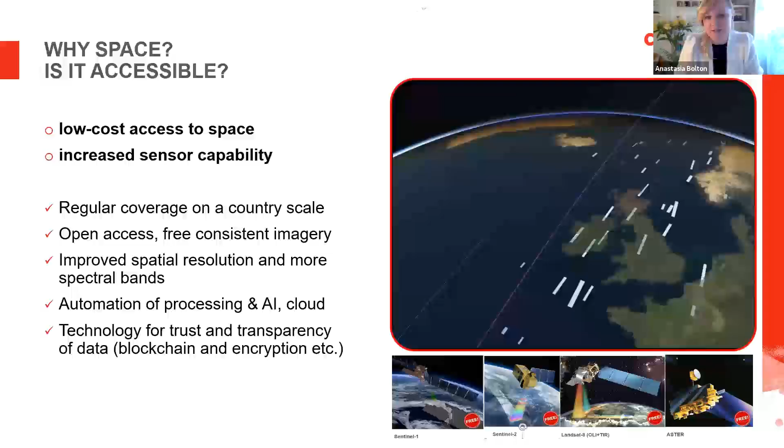Next slide please. In terms of impact, safety is of course vitally important, especially with those dams located upstream near heavily populated areas, where the consequences of failure could be really great. So the proposed remote management and monitoring system could really help with early warnings, which could help save lives and prevent environmental damage. It would be a tool to help make fast and informed decisions, reduce failure risk and associated costs, and improve asset management and monitoring. We can also look into the past, because satellite data goes years back, and we could analyze historical data. And satellite technology is open to work in combination and collaboration with already existing methods.

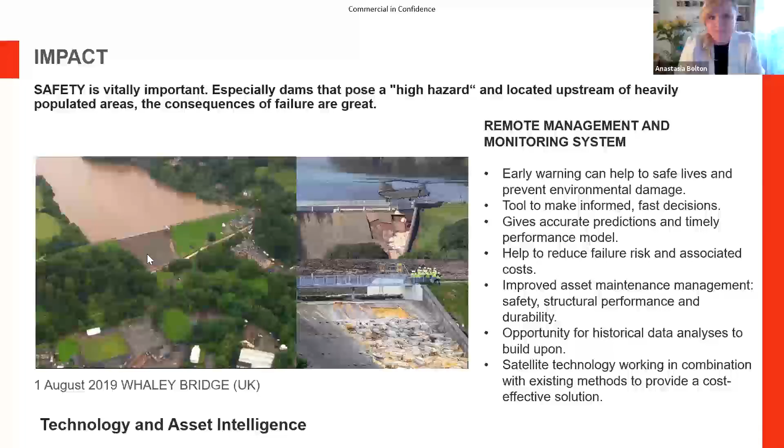Next slide please. You would ask how the technology works. It's very simple, I put several slides to explain, I hope you'll have more time to look later. But basically, we're analyzing images from space, and we could understand the movement of the ground in millimetric accuracy from space. We could understand how points on the ground are moving, and when we have lots of points on the ground, we can have a more full picture. Next slide please.

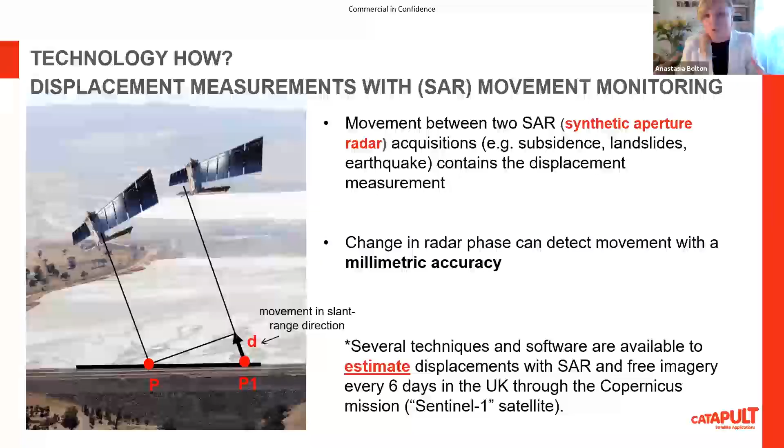Here's an example of how the technology is already used in mining. This is an example of how we're analyzing tailing storage facilities, or tailing dams, with the same technology.

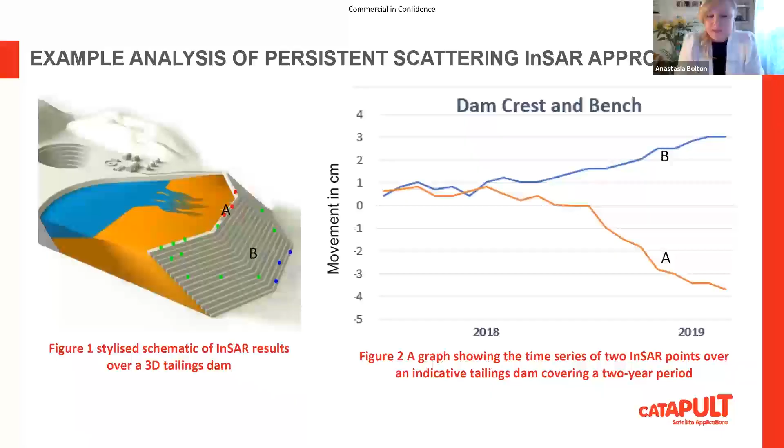Here I've put some of the existing platforms and visualization tools, some of which are already in place. The one at the top is for tailing monitoring, and at the bottom is the one which looks over floods and predicts them, and the one on the right hand side looks over large infrastructure such as bridges.

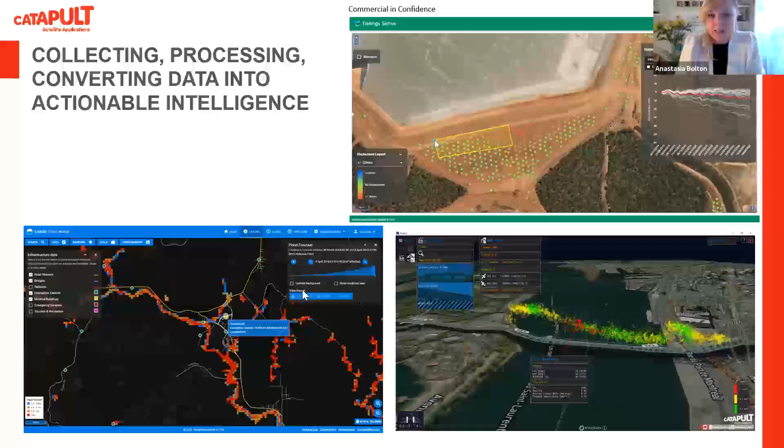I also wanted to mention that Catapult's human-centered design and collaborative approach is really important, because we're really trying to ensure that the solution which we design is based on a deep understanding of the needs and requirements.

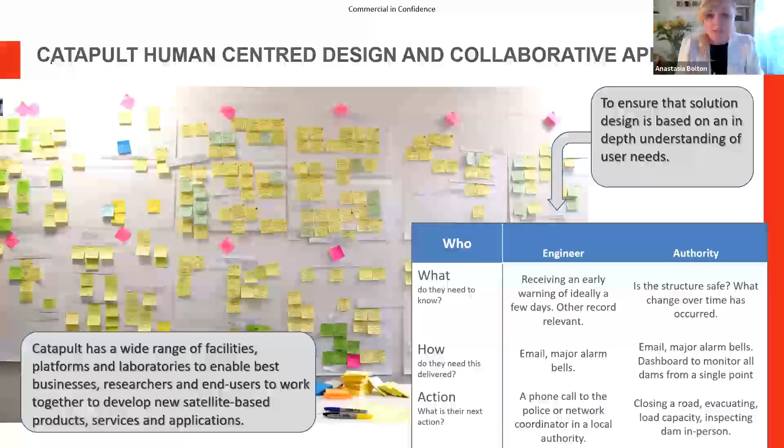Here's what we are looking forward to. I hope to build relationships today with one or several water companies, and I hope to develop this solution into an initial pilot which we can take further.

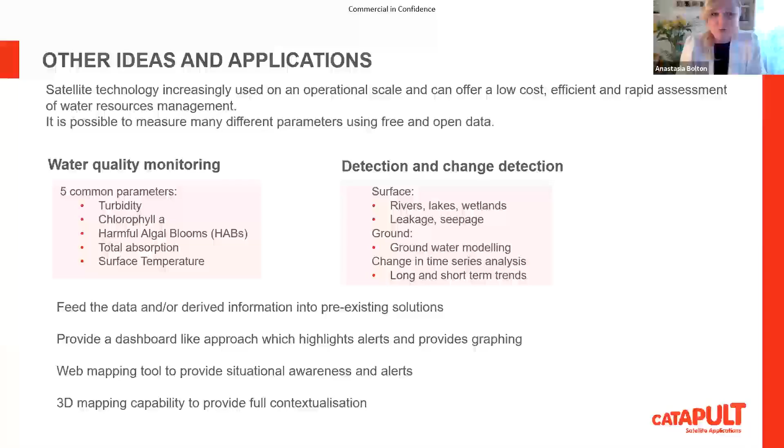I know there is another space company talking after me with other solutions from space, so I put this slide together for you to read later.

I think I'm done, I tried. Thank you, Anastasia, that was really difficult - you covered a huge amount there, so I appreciate that. I could see that you had a large number of slides.

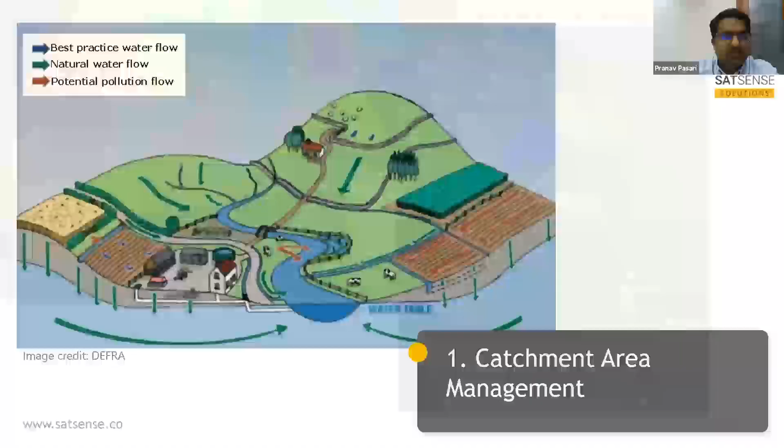As many of the water companies here have extensive catchment management practices, the importance of having healthy catchments is well understood. I'll be showcasing how satellite data can be used to facilitate and enhance catchment management practices.

In this example of a catchment management case study, satellite-derived topography data is used to demarcate catchment boundaries and determine flow directions. Land use and land cover is assessed within the catchment. Hazards and risks specific to the water resources are then identified. In this case, a salvage yard very close to the reservoir with a drainage direction towards it is identified.

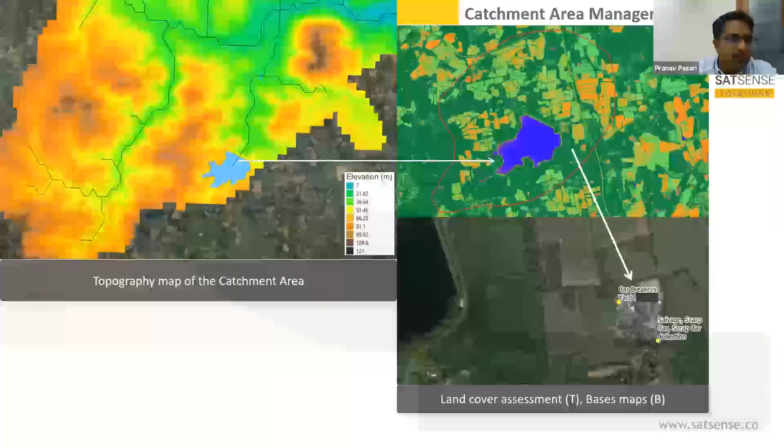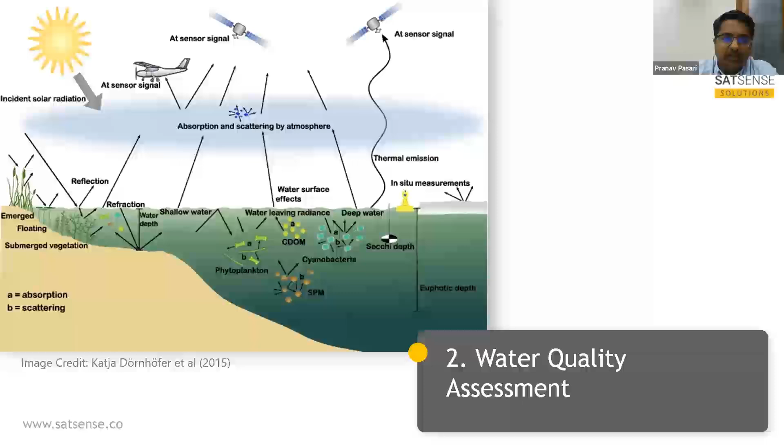The second solution we would like to share with you is water quality assessments using satellite remote sensing. The working principles of this process are indicated here. The inherent optical properties of surface waters are evaluated, and parameters such as total suspended solids, chlorophyll A concentration, color dissolved organic matter, and transparency can then be assessed.

In the images here, we see TSS assessed in a reservoir and a river. As you can see, water quality parameters assessed are spatially represented for the entire water body, unlike point data collected by conventional methods. This solution can be used for the early detection of harmful algal blooms, managing sedimentation of reservoirs, and bath water quality assessments, amongst other applications.

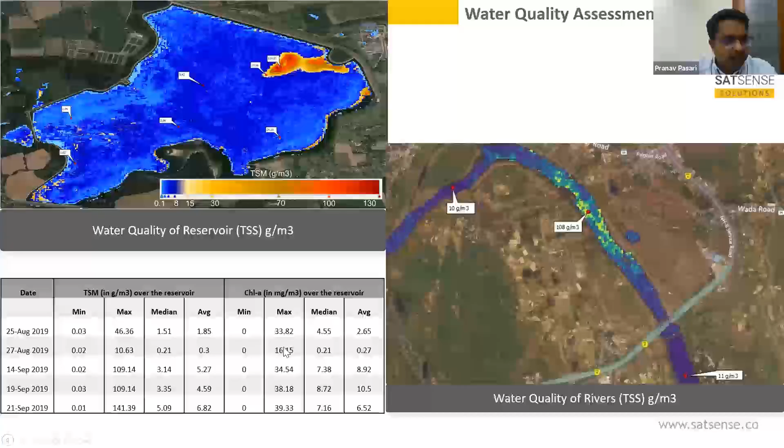The third solution we'll be presenting is water budget estimation. This allows water managers to understand the amount of water entering and leaving a river basin. The working principle of this process can be seen here. The main factors assessed are precipitation, evapotranspiration, and discharge.

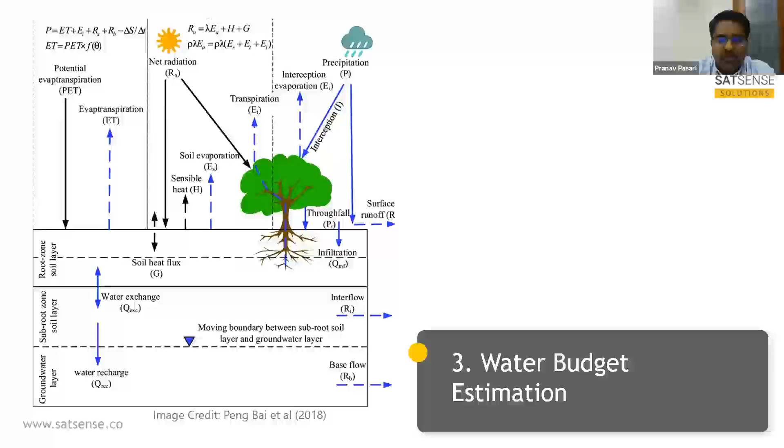In the case study shown here, the area of the entire river basin is demarcated. The different watersheds and drainage directions can be seen. Water available within a river basin may be estimated by deducting evaporation, transpiration, and runoffs from the total precipitation. Precipitation, evapotranspiration, and changes in terrestrial water storage can be obtained from satellite data. Land data simulation models and in situ data may also be used.

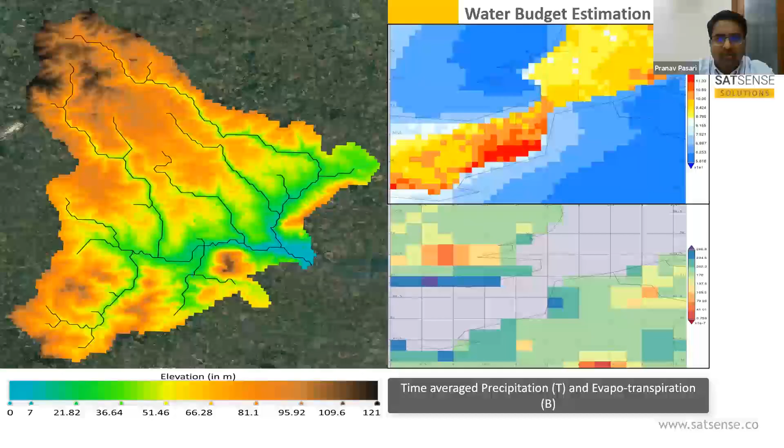Due to time constraints we have provided only a brief overview of the solutions. These solutions provide numerous benefits. They are comprehensive and efficient when compared to conventional methods, and can also be more cost effective. We would be happy to have a detailed discussion with any of the water companies. We are looking to partner with water companies to implement one or more of these solutions in an operational setting. Thank you for your time and consideration. I'd be happy to take questions at this time.

Thank you for your presentation. Succinct and clear, and some things there I think which are a good call out to the sector. I've got one question here, and there might be a couple of others which come through. So sure, let's dive into those.

It's that many parts of the Western UK are covered with cloud cover for much of the time. I'd say probably most of the UK, that probably impacts. How would this impact the use of satellites to gather data?

So that's an excellent question, actually. We actually did a feasibility study for one of the England-based water utility companies. We analyzed the cloud cover, and because many of the satellites have frequent overpass over the UK, we found that we were able to get at least one water quality assessment every week. Most of these were for all 12 months of the year. So because of the frequency in satellite overpass, we were able to get consistent data over UK.

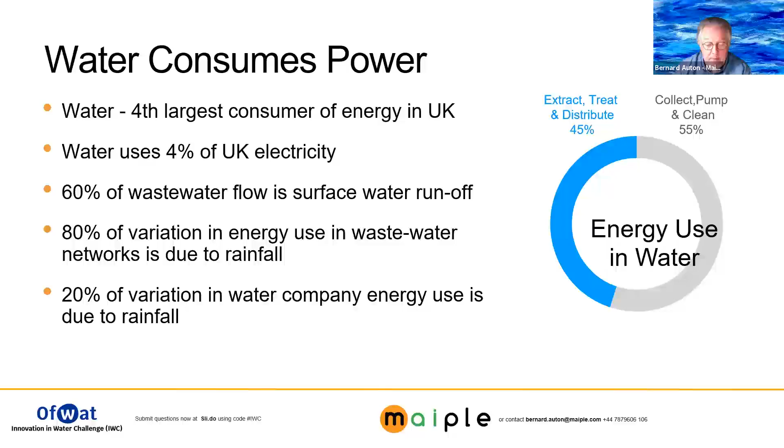Let's have a quick look at these 4 linked projects to reduce costs. On each slide, we show the technology readiness level, the TRL, where we are now in orange, and where we want to be at the end of this Innovation in Water program in darker blues.

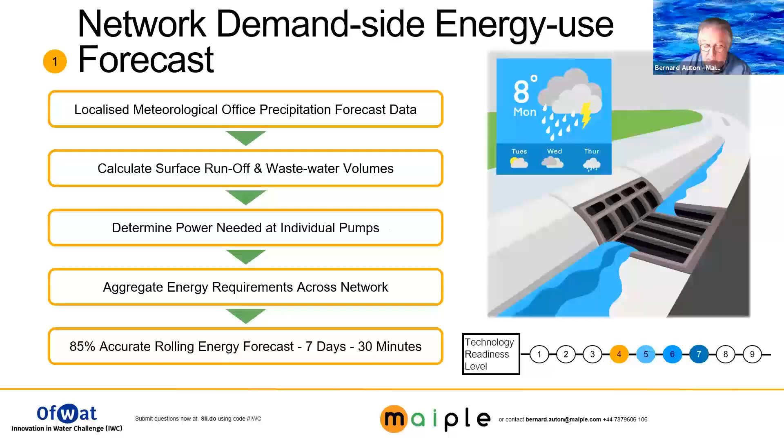There are 5 steps to creating your demand-side energy use forecast. You can use this accurate prediction to procure power from generators and aggregators at less cost. A better forecast means energy companies can provide more electricity from renewables and balance loading across the grid. Using less energy and a higher proportion of green power across a better balanced grid makes a significant contribution to our net zero targets across the water power nexus.

We then compare the actual versus predicted energy used by each pump. If a pump is using more power than expected, that might indicate an issue with the asset. If it's using less power than forecast, that might indicate a problem upstream in the network. These anomalies trigger alerts in your control rooms and management systems.

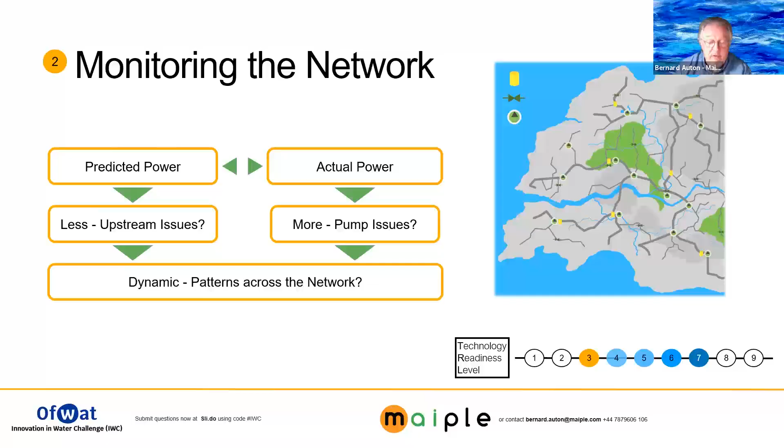Maiple can monitor the energy consumed by a pump 10,000 times a second. This very high frequency sampling helps us characterize the pump. Changes in the equipment profile warn us of component wear and failures before it stops working. Condition monitoring of your network helps prevent pollution penalties, costly disruptive breakdowns, reduces maintenance costs, and informs your CapEx priorities.

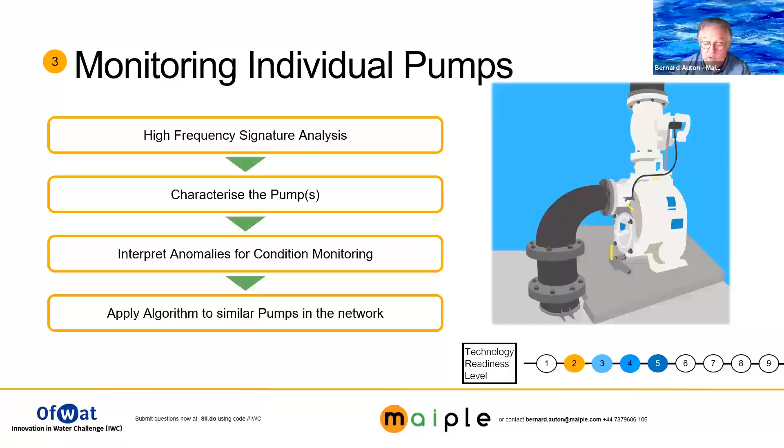Maiple wants to work with your teams and partners across the sector to continuously improve forecast accuracy and interpretation of existing and new data streams, such as those from satellites.

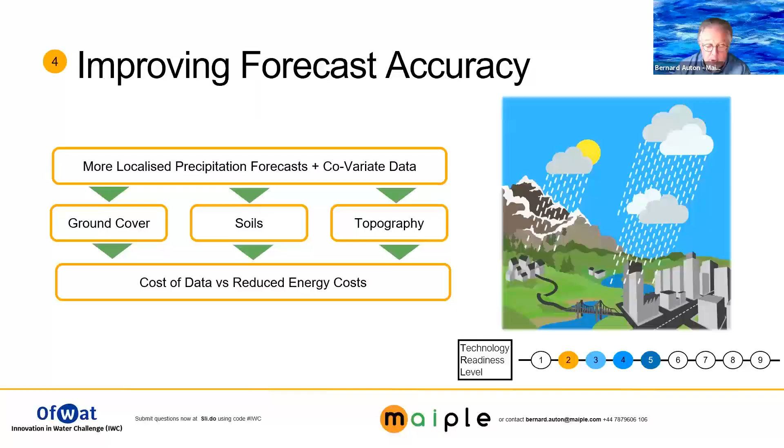Water companies have watched the weather for hundreds of years, but now you have access to a lot more data from many more sources in real time. We use artificial intelligence to help you interpret all that data, generate better information to reduce both your costs and your carbon footprint.

We work together to ensure your team's deep knowledge and long experience is embedded in the algorithms on the Maiple AI platform. We use models, including machine and deep learning, to understand your data and deliver informed recommendations. We connect to various devices, cloud to edge-based, deployed across diverse, robust, and secure networks. With a greater understanding of your operations, you can make quicker, better decisions.

To help you understand our proposals better, we've prepared more detailed documentation, including project plans, budgets, and a risk register. These are based on our experience running a proof of concept with Welsh Water last year.

We forecasted the energy required by 129 pumps over the next 24 hours with 85% accuracy. While less than 20% of their assets, these pumps use more than 70% of the energy in the network. Welsh Water are confident they could reduce their energy costs by as much as 5% with this accurate, more timely forecast. Monitoring their network in real time would also reduce OPEX and CapEx.

We want to work with other water companies to generate a demand-side energy use forecast and help you procure greener energy at less cost. We also want to use energy data to monitor the condition of your network. We wish we had more time, but would like to get together as soon as possible to discuss these opportunities in more detail so that Maiple and you can take these ideas forward as a great innovation in water. Thank you for your time, and we welcome any questions.

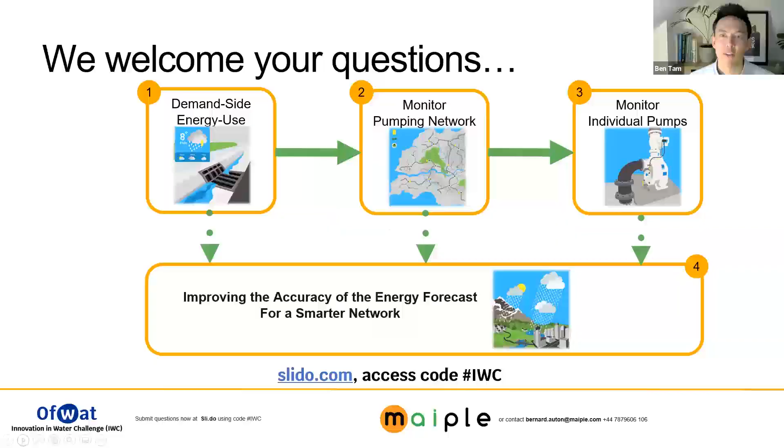Great, thank you very much. So this afternoon, for the next 4 minutes, I'm going to talk to you about some multifunctional autonomous water quality sensors that we've been working on at Imperial College for the last 3 years. I'm just showing you an image in the top right, which shows you the actual completed sensor array, which I'll describe in a moment. But it's basically the size of a small pen.

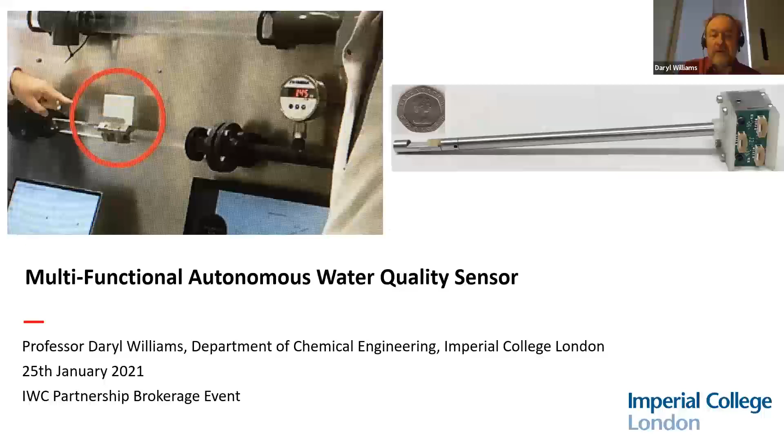So the background on the project: we've been working for the last 3 years with the Department of Electrical and Electronic Engineering, and also with a global automation partner. Really, we're trying to deal with the following challenge. If you look at the sort of instrumentation that's commonly used in the water industry, it's remained relatively unchanged for 40 years - devices for measuring flow, pressure, temperature, pH, conductivity. You tend to end up with very large, expensive, heavy, cable-dependent, high resolution, invasive, permanently installed sensors that only do a single measurement. On the right, you can see a large flow meter - these are big, expensive pieces of infrastructure.

The question we posed ourselves is, how could we revolutionize the industry if we had sensors that were small, lightweight, cable independent, self-powered and wireless, did more than one measurement with low capital and maintenance costs, and could potentially be put in a network in a pervasive way. Devices of this type would allow us to deal with some of the big challenges that Ofwat and the water industry face: asset management and monitoring for maintenance, leak detection and reduction, monitoring water quality, and reducing energy consumption.

The idea really is to use the sort of sensor technology that you find used in mobile phones these days. We developed some devices using the sort of sensors you see on the fingertip there, which are very small, low powered, easy to deploy, and intelligent. Once we've got wireless data, there are also opportunities around the cloud and large data analysis.

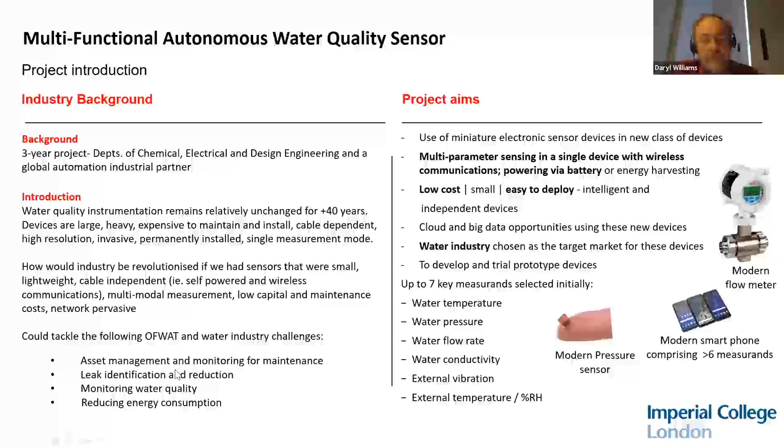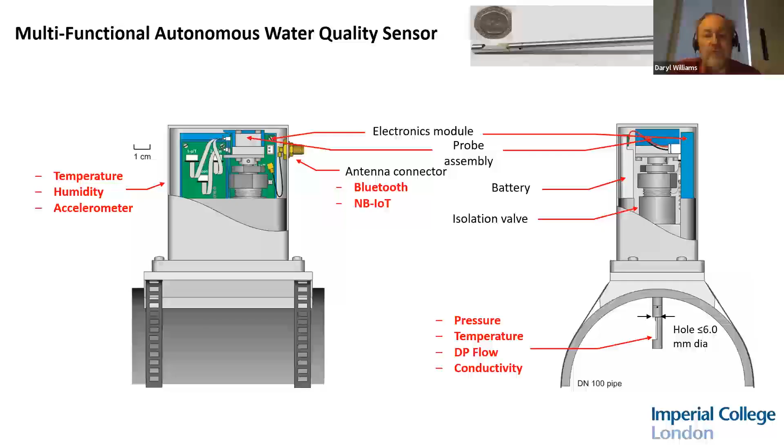So what we've done is develop a minimally invasive installation approach involving a 6 millimeter hole, and we can install into pipes above or below ground. The sensor array itself is very small, about the size of a pen, 6 millimeters in diameter, 150 millimeters long. Once the installation is in place, you can insert or remove a sensor array within 5 minutes. We measure these 7 properties via the battery and wireless system, and it's a flexible platform, so other properties can be added in due course. We measure data on both the water quality and the pipe environment.

This can go to the cloud and be integrated with other water network data sets. We're currently building 10 units, and we're looking to run a field trial in 2021 to look at the performance of these sensors inside a real water distribution network. So we're looking for a water board partner and supporting funds for a field trial. The objectives for the field trial are given there, but we're looking to see what sort of data we can obtain, and how that can help you understand and better manage your water network with this low cost, easy to deploy, battery wireless technology.

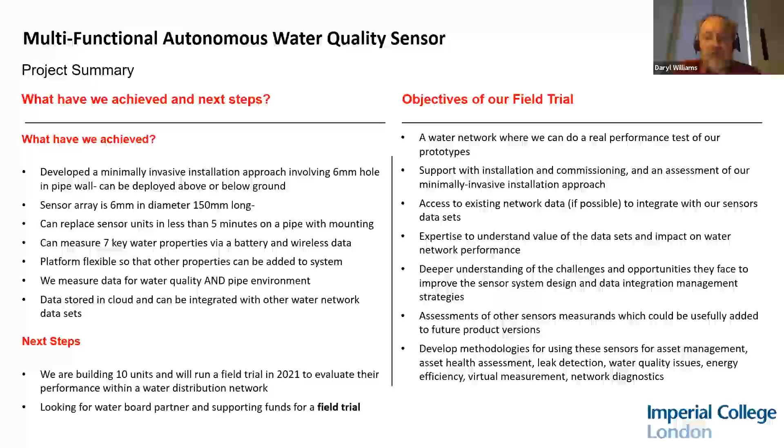Those slides are there for you to look at, but I'm quite keen to have a couple of minutes to take any immediate questions that you have. So I'll stop talking now and take any questions.

Thank you very much, Daryl. That helps, and I appreciate lots of information on those slides. So I'll dive into some questions here. They're coming fast through for you, and I'll start with: what is the lifetime of the sensor that you know so far, anyway?

The first generation devices for this trial are designed for a 6-month trial, but the longevity of the devices depends on how big the batteries are that you put in them. So we could have them last 2 or 3 years, but for the trial, the batteries are designed for a minimum of 6-month life in the field.

Okay, so that kind of answers these other questions here about battery life. Do you want to say anything about whether there's a difference between what you're going to trial and what you'd hope for in the future? Yeah, I mean, that's a function of discussion with our clients. We can put bigger batteries in and have a 2 or 3 year life quite easily if we wanted. So at the moment, it's only a question of the size of the battery.

There's no other technology constraint. The batteries are quite small, probably about 4 centimeters by 2 centimeters by 4 centimeters. If we had a bigger battery, the life just scales automatically. There is also a possibility in the future of adding energy harvesting. We haven't got that at the moment, but there is scope for it in the technology.

Does it have any alarm functionality? It will have alarm functionality. The devices are very intelligently programmed, so they'll automatically upload data to the cloud, and that can include local alarm data.

Probably the last question here, quick fire. Is there a plan to include turbidity? Well, we had a list of about 10 in our initial list, and the two that aren't in this particular device are turbidity and pH. But we do have approaches for both of those, we just felt we needed to get closer to the water boards and get better alignment with their needs. We certainly have some approaches for doing turbidity, and that's a possible technology we could incorporate in a future version of this device.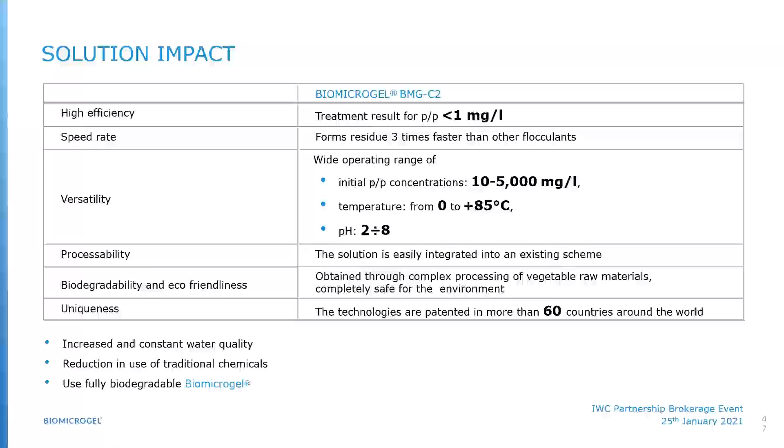Next slide. On our status, we operate in the European Union, Russia, CIS, USA, Australia, and Brazil. We have more than 60 patents in more than 50 countries. We have 2 production plants, 4 labs, and our own R&D and engineering support.

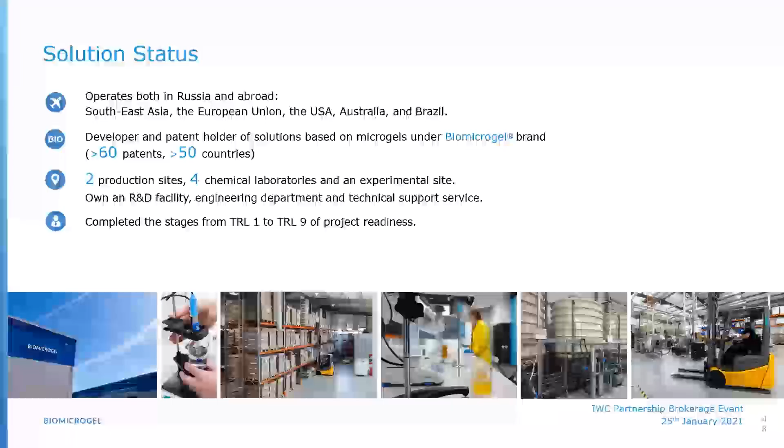Next slide. Briefly about our references from the previous year: we work with a Severstal company, where we separate more than 300 cubic meters per day of cutting fluids, reducing levels from more than 4,500 milligrams per liter down to around 1 milligram. That's a success. You also heard about the disaster in the north of Russia last summer in Norilsk, where we brought more than 3,000 square meters of our filter cloth, and we recovered from the rivers more than 8,000 tons of diesel, bringing it back into the cycle.

After that, we get the recommendation of Ministry of Emergencies of Russian Federation. Regarding today's bullet, we have activities in Knauf and Russian Railways with storm water treatment, where we clean up more than 400 cubic meters per hour, and we show the treatment result improving from more than 400 milligrams per liter to less than 0.07 milligram.

We had the certificate, after trials and tests, from the European Commission in Horizon 2020 as a high quality project proposal, and also Equatech best technology. That's basically it. Thank you for your attention. And thank you, Ben, for your support. I'll be glad to answer your questions.

Thanks, Vadim, for a quick, sharp presentation there. They're very clear about where this fits. Can't see any questions at the moment coming up. We have one actually, let's dive straight in.

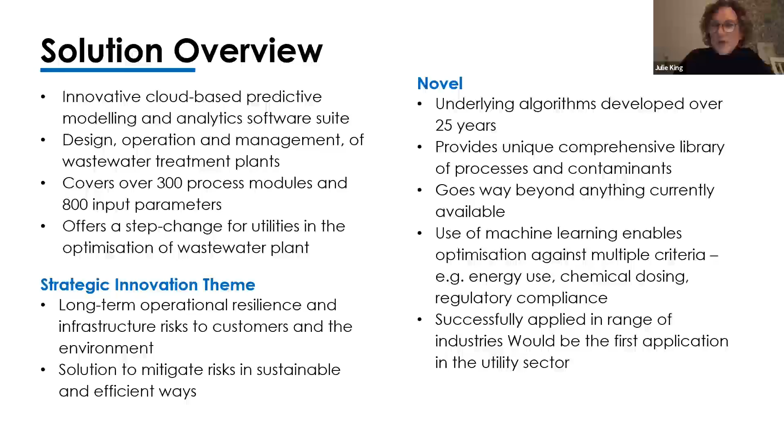Next slide, please. As you saw in the previous slide, Waterhound software is a risk assessment tool, providing management with transparent, science-based data analytics from within their system that is independent of supplier bias and operator error. This includes risk assessments for performance, partial and complete component and plant failure, and environmental risks and consequent reputation risks. And importantly, using Waterhound software to optimize a treatment system goes to mitigating climate risks by reducing abstractions of local fresh water supplies, chemical usage, and by minimizing energy consumption to lower the carbon footprint of operations. This helps to reinforce goodwill within the communities where your operations are located.

In terms of cost reductions, improvement in performance optimization, and reductions in water, energy, and chemicals in operations, companies have historically reduced OpEx between 8 and 38% with hardware designed using the underlying algorithms in Waterhound software. Next slide, please.

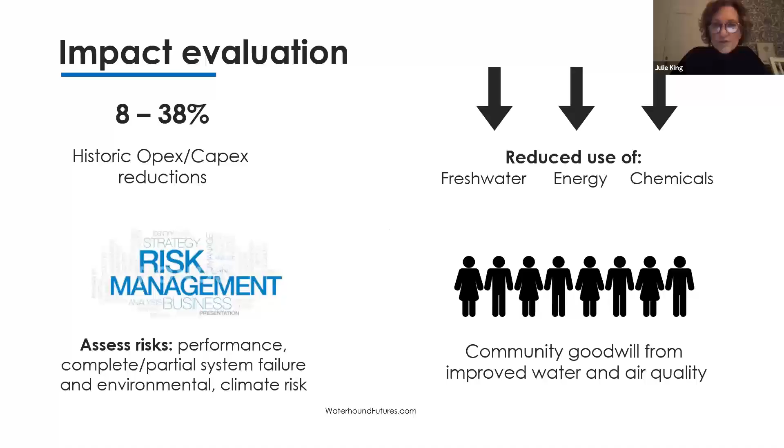As I just mentioned, our offline model has been applied successfully in a range of industrial wastewater treatment plants for Fortune 500 companies. The software is ready to test as an independent tool or to augment functionality and versatility of existing software packages you may already be using.

Our ask today is for an opportunity to apply our learning from the industrial sector to the utility sector. To do this, we require access to data and to plants, and we are able to also provide a COVID-era compliant remote access and monitoring option. Next slide, please.

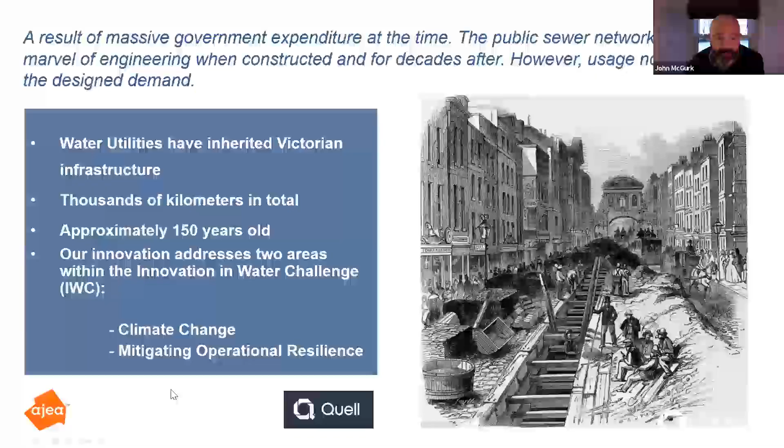Next slide. Because we all know climate change is irreversible, with flooding considered one of the most widespread and destructive side effects of it. Next slide.

Why has mitigating against climate change and achieving operational resilience been so difficult so far? I believe this is due to the fact that all mass market flood protection systems are manual, meaning in order to have any efficacy at all, end users would require advanced notice of a flood, the physical strength to retrieve the items from storage and position, and the dexterity to install them.

Quell is different. A game-changing level of performance, delivering 24/7 protection, autonomous deployment that doesn't require any source of power, easy to install and maintain. Quell is as close to fit and forget as we think is possible.

Hopefully our video plays. For the video, we've removed the enclosure and the lid to expose a single module of the barrier system to illustrate how it reacts in a flood event.

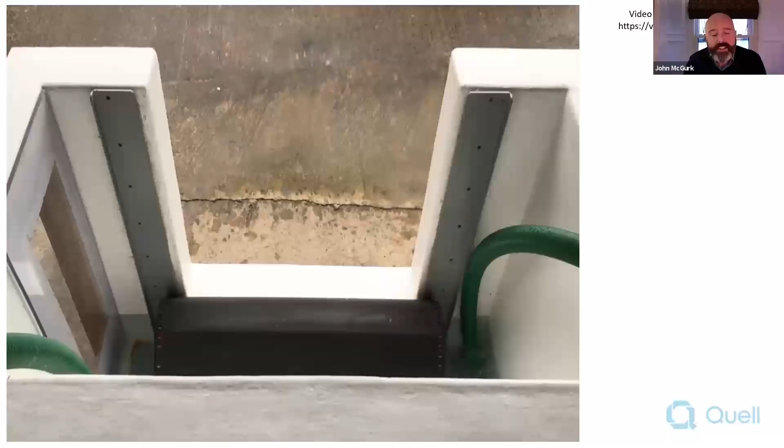Once the critical buoyancy level is reached, the autonomous deployment begins. The single module in this test tank has been inundated with 1.6 tons of water. The patented design controls how each section detaches from the core and subsequently attaches to the frame. This is achieved by magnetics strategically placed in each section. The entire module is wrapped in a closed cell foam rubber material.

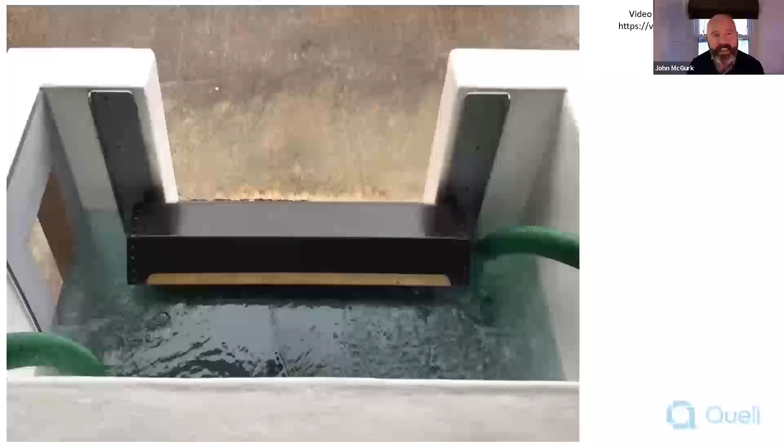This elegant solution acts not only as a living hinge between the sections, but also as a watertight gasket, meaning that the greater the pressure on the barrier, the more it is compressed, enhancing the watertight seal. In the close-up views, you can see the black core element of the barrier. This is highly buoyant yet impact-resistant EPP, a molded foam.

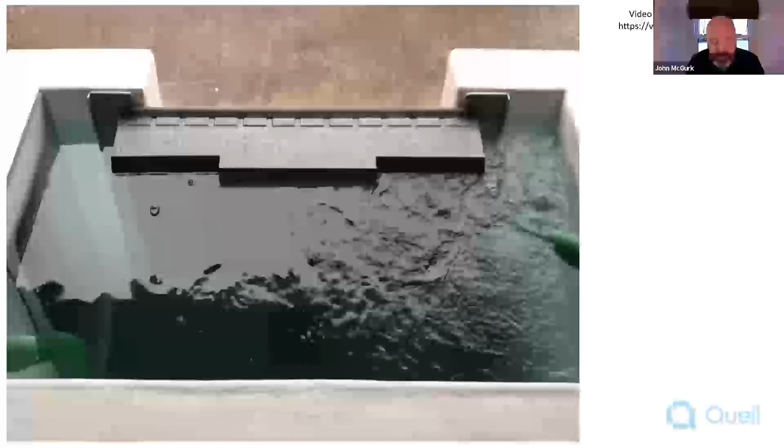The Quell flood barrier system has been designed to address the negative impacts of climate change by harnessing the forces of a flood to protect properties, critical assets, and communities from that flood. We hope to collaborate with water utilities through the Innovation in Water Challenge to demonstrate that a simple yet effective solution can address the evolving needs of customers, society, and the environment. We believe that a successful collaboration will enable us to validate our solution, which would then be readily scalable across the sector.

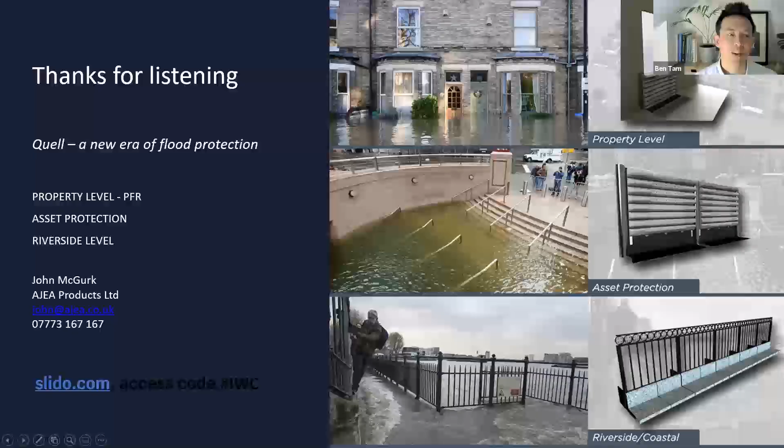Hello, hi, good afternoon, thanks for hosting me. My name is Guy Meiri, I'm the head of business development at IOSight. What IOSight does, and has been doing for the last 10 years or so, is data management and analytics for water, for different types of water utilities and water systems. I'm going to speak today about a specific solution that we offer, iGreen, for water quality monitoring in surface water.

So iGreen is basically a mature solution. It's an innovative, however, mature solution. It's been operational since 2017, installed at the Jordan River in Israel, the Jordan River watershed, and operated by Mekorot.

The national water company, that's our first client. It's an efficient, comprehensive nerve center, 24/7 algorithm-based anomaly detection of water quality anomalies. Basically, it's about eliminating 95% of false alerts coming out from raw data, and providing propagation calculation downstream, so you can respond accordingly. If we have an intake station downstream somewhere, you can change the composition of chemicals or shut it down or whatever. It has an event management module, which provides push alerts through text messages and emails, and mobile and web dashboards, and also reporting.

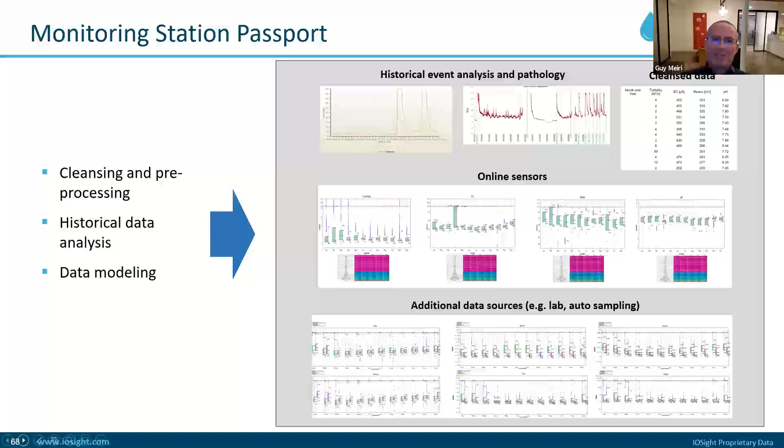Then we start collecting the real-time data from the station and applying the data analytic techniques on the sensors, creating the integrated water quality index for each sensor and per each station. And only when a certain threshold has been exceeded, then an alert is being generated. So you can see green, yellow, red very intuitively.

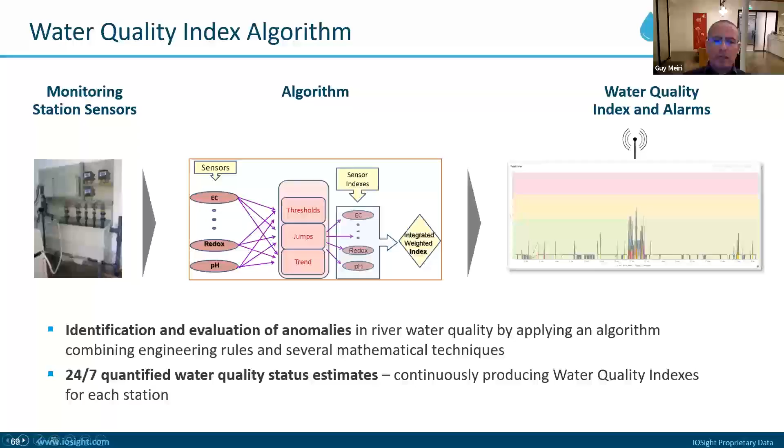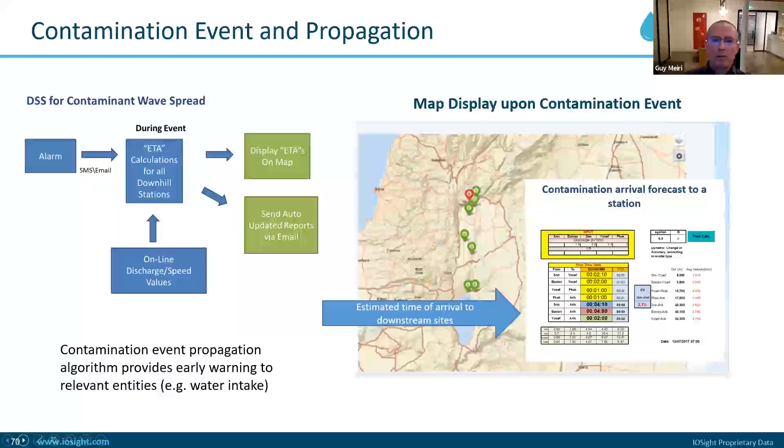And upon an event, there is a downstream propagation calculation, a second algorithm, which is being triggered, helping you respond to that specific event. You can see examples of the dashboards, the web dashboard, as well as the mobile dashboard. These are actual screenshots from a real installation, the one that I showed.

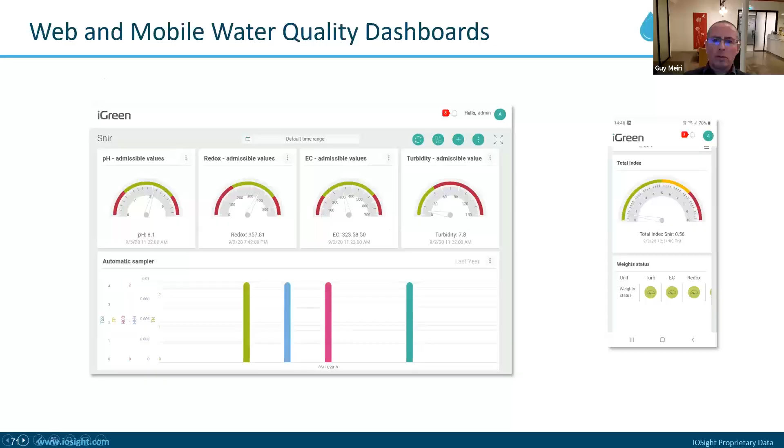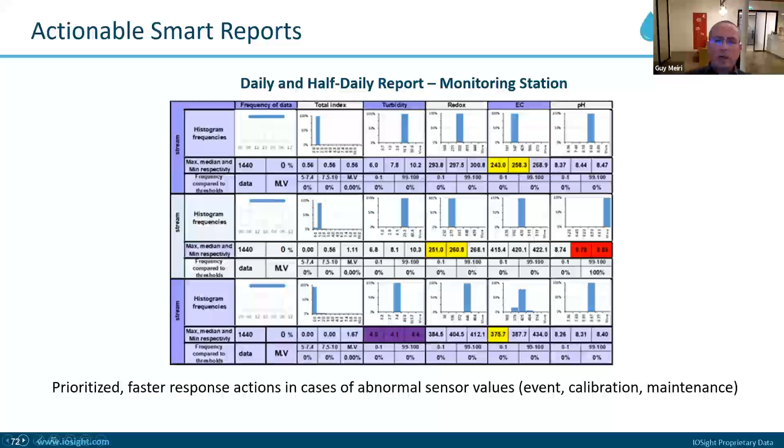And also actionable smart reports. So twice a day, or as you define it, you can get smart reports, providing you insight into what's happening in your water, in your watershed, in your surface water source, and also alerting on anomalies in sensor behavior. And as I mentioned, an event management module based on a rules engine through text and email.

We have another project in Chicago, the H2Now Chicago, real-time water quality monitoring in the Chicago River. The thing about that is we collect different types of data from different types of sensors. Actually, a UK-based company called RS Hydro Proteus. And that's the second project we have with iGreen.

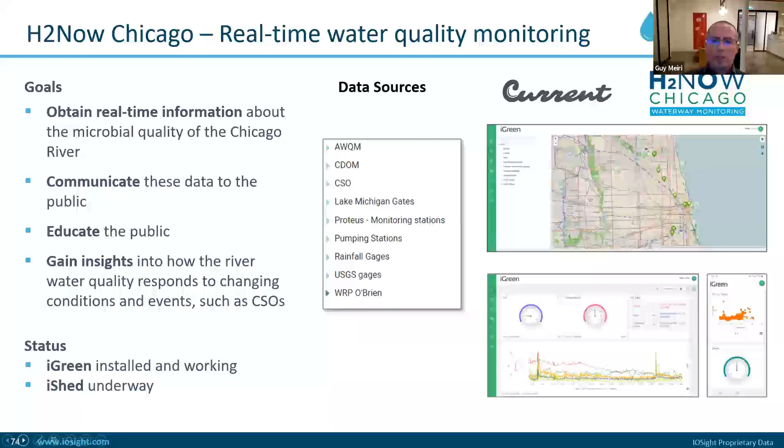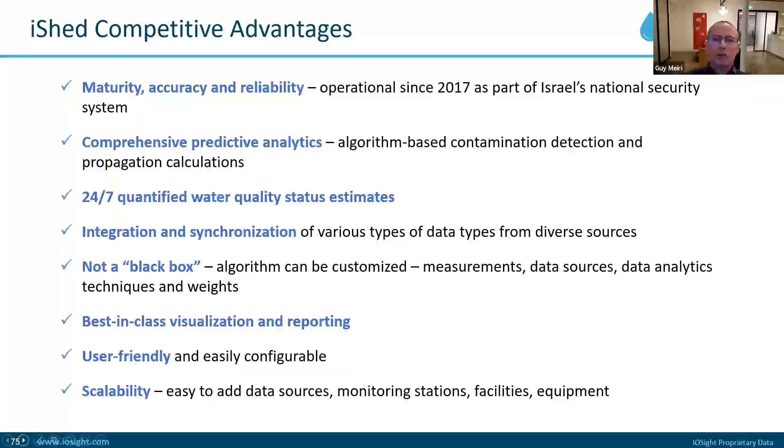And to summarize, I can stop here. I think it's basically a proven solution. It's flexible to address different types of surface water sensors, and yeah, that's it.

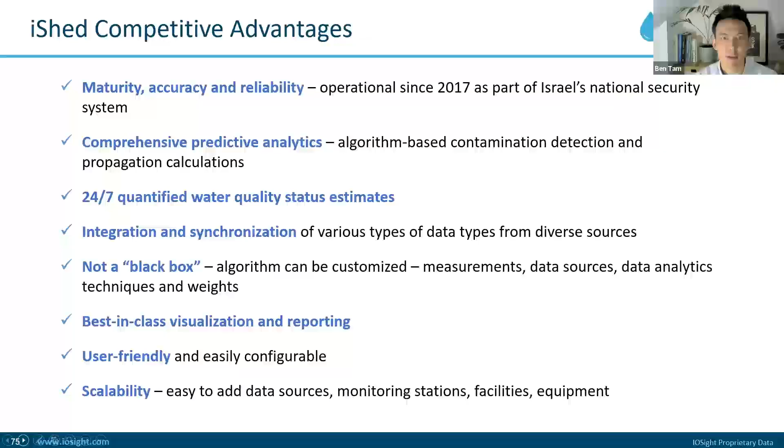What makes this solution innovative? So I think, as far as we know, that's the most innovative, accurate, and proven solution for real-time water quality monitoring in rivers, watersheds, and surface water. So it's not just about the raw data, it's about applying the algorithm. It's about elimination of false alerts, turning it into an actionable solution. So you get the layers of getting the various types of data, integrating them from the sensors, and then providing the analytics as well as the alerts and the event management. So it's kind of a comprehensive solution. And I mentioned the downstream propagation. So as far as we know, it's the most advanced and proven solution. As I mentioned, it's been used by Mekorot to protect Israel's northern watershed for 3 years. So it's proven, that's another aspect.

Cool, there aren't any other questions, but I guess we've got 20 to 30 seconds. What is it you need from a water company in terms of a potential partnership project here?

So I believe water companies that have source water coming from surface water will probably ask to connect to their monitoring stations if they already have sensors installed, to collect data from those sensors, and maybe also other types of data like laboratory data and weather data, and kind of do a pilot like we're doing in Chicago right now. And hopefully we can help them identify in real-time water quality anomalies.

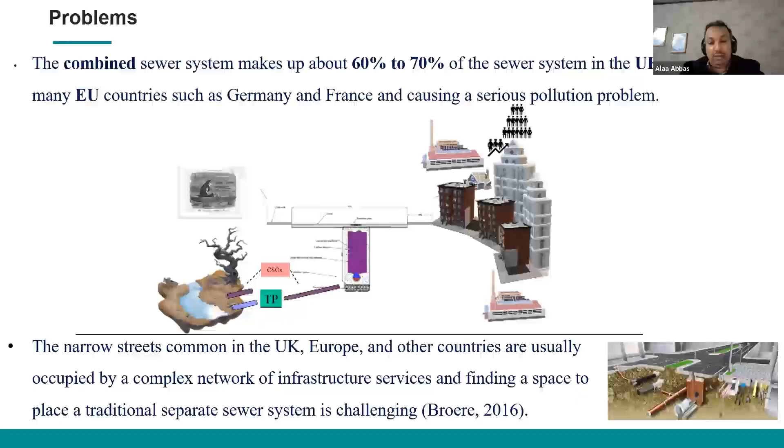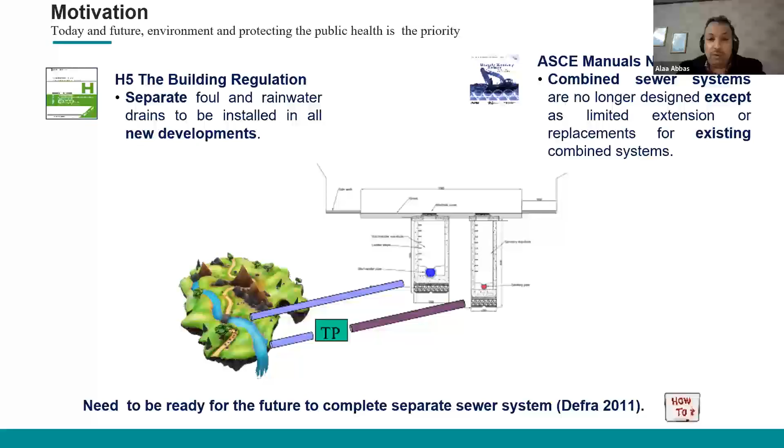The motivation behind this research is that new regulations impose using a separate sewer system in all new developments, and combined systems are limited to replacing or extending existing systems. A separate sewer system has 2 manholes, and water companies now set up separate sewer systems in all new development upstream of the network, but downstream it connects with the existing combined sewer system. We had a chance to chat with DEFRA about this, and the answer was that we need to be ready for the future to have a complete separate sewer system.

This research is an attempt to provide an innovative separate sewer system that can reduce the space and save construction cost and time. Through this design, we gather the two systems into one new system, which can reduce space and construction cost. So instead of two manholes used by the traditional separate sewer system, we use one new manhole. The flow comes in at the pipe at the top, enters the external chamber, flows around the inner chamber, and exits from the next top pipe. Foul flow flows in the pipe at the bottom, connects with the bottom inner chamber, and exits directly from the next pipe.

This solution represents a cost-effective and space-efficient alternative to the conventional sewage technology used for the past 100 years. It protects public health and the environment by using a separate sewer system, reduces initial cost by 10%, decreases construction time by 40%, and decreases footprint by 20%. This will minimize disruption in city streets through the installation process. Also, this system has been tested and has improved structural and hydraulic properties which can mitigate flood risk.

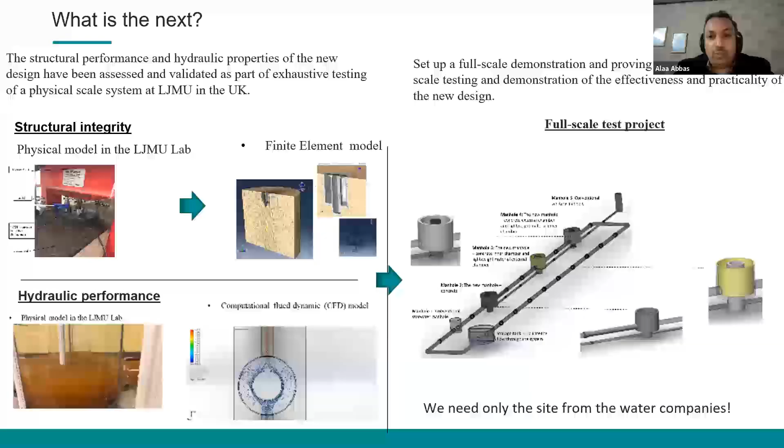We tested this new design at Liverpool John Moores University for more than 4 years using a physical lab for structural and hydraulic performance, and used the results to validate FE and CFD models. We believe we are ready now to move to the next step, which is to scale up this design for testing on site. We are looking for one water company to provide us with a site for testing, and maybe we'll use it as a platform to go for the Ofwat competition.

Just to wrap up, with that I would like to thank you. I'm ready to receive any questions, please.

We've got a couple of questions here, maybe just a clarification on the solution. One is, what's the green box labeled TP signify? Can you repeat the question, please? Yeah, what does the green box labeled TP signify?

Sorry, I didn't get the question actually. So there's one of your slides for the innovative design for a separate sewer system. Go back one here on the left-hand side. TP, I think that's the treatment plant. So combined sewer system, it's moved.

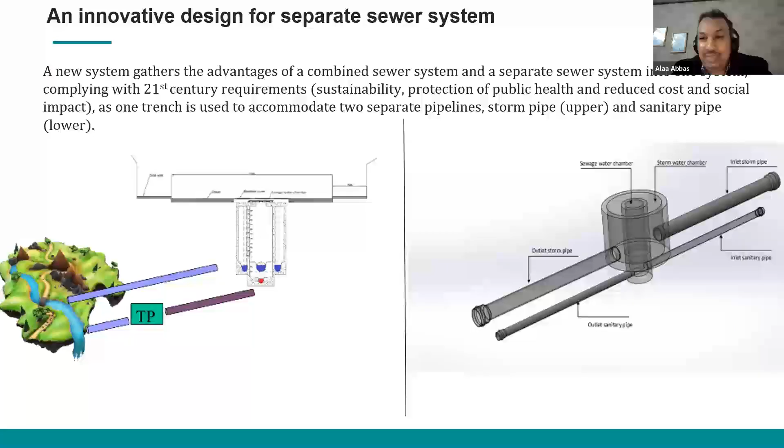The foul is moved to the treatment plant before discharge to the rivers or water courses. So this is a treatment plant. Yeah, so for that. And is this for new installations, or can it be retrofitted?

It can be used for both actually, to separate an existing system, and I have maybe a special video and explanation of how we can separate an existing system, or maybe set up a new separate sewer system.

Okay, and I think that answers the other question there, which is around: is this solution around the manhole, or actually relaying separate storm and sewage network works?

Yeah, it presents a new design for manhole, different from what we used before for more than 100 years ago. So it's a new design for manhole, allowing the separate sewer system to be used efficiently. Thank you. And just one quick one as well.

How does it accommodate different pipe gradients and pipe diameters? In one trench, we tested this also in the lab. We set up different pipe diameters, and it works. There are special criteria to do the installation, actually.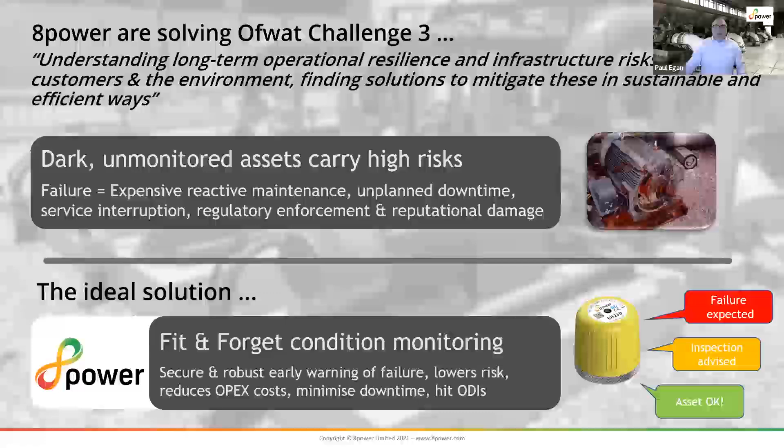Well, 8power is now hoping to address that need by making an easy-to-retrofit system to provide assets with data and insight in a readable way that will enable you to do early intervention to prevent major asset failure. Next slide, please.

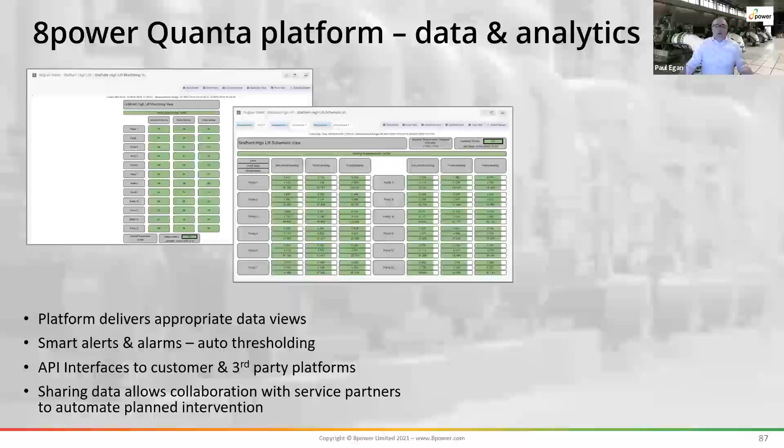But obviously, if you need to, you can click through and see more detail. So the next view would be more for someone in operations or in the control room who might want more detail, say actual specific temperatures or maybe vibrations or other calculated KPIs.

For problem diagnosis by a tech or service partner, you might want to see more data. In this view, you can see trends of data going over time, which could help you plot some of the other things we're seeing. And for the expert, we've got full fast Fourier transform, or FFT, spectrum views of individual vibration recordings, and a trained eye can see the various things going on there.

These views are available on desktop and mobile, and we've got an API to your existing platform. Alerts can be sent by text, email, tweet, or almost any other kind of platform. I think flexibility is key when it comes to this. I've got another slide on data sharing shortly.

We're up and running on 15 sites with 300 sensors in the field, collecting hourly data. Our system's in production with Anglian, Yorkshire and ABB, and we've done quite a lot of work with Severn Trent as well. We'll shortly be launching a new sensor that gives 5 years worth of data on a single battery, and with energy harvesting, we can make sensors maintenance free for 10 years. We've got some new software things coming out as well.

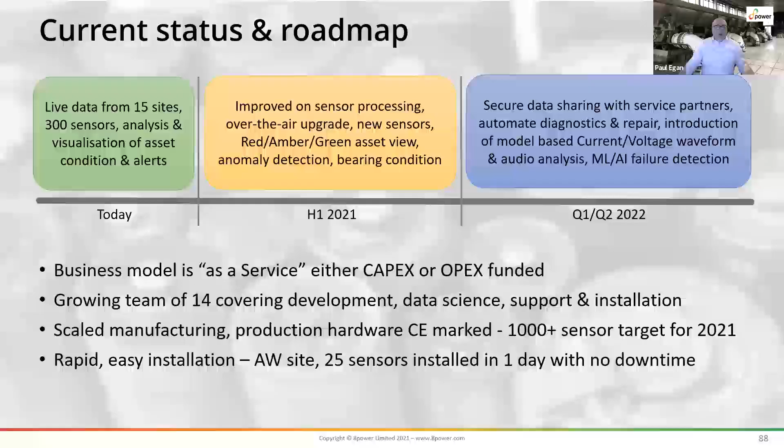In terms of an ideal partner, we'd be looking for a partner that wants to run a project rather than a pilot or a trial, and wants to move to condition-based maintenance. To get the best value out of this, it's going to be about the opportunity to both share data internally and potentially with external customers as well. We think data sharing, and particularly automating response around conditioning, is going to be the next big thing.

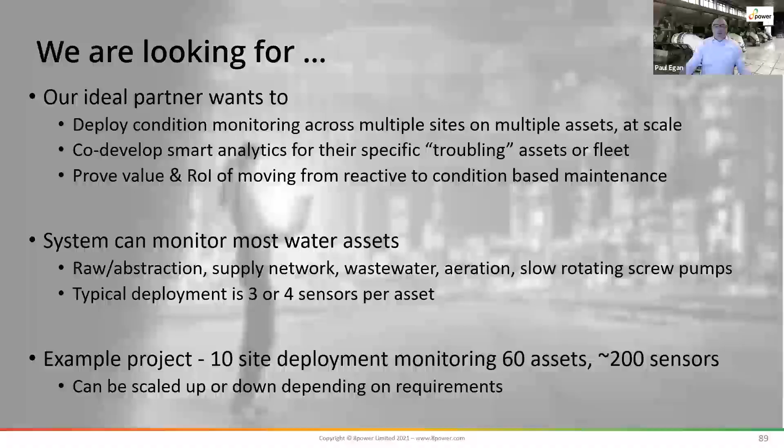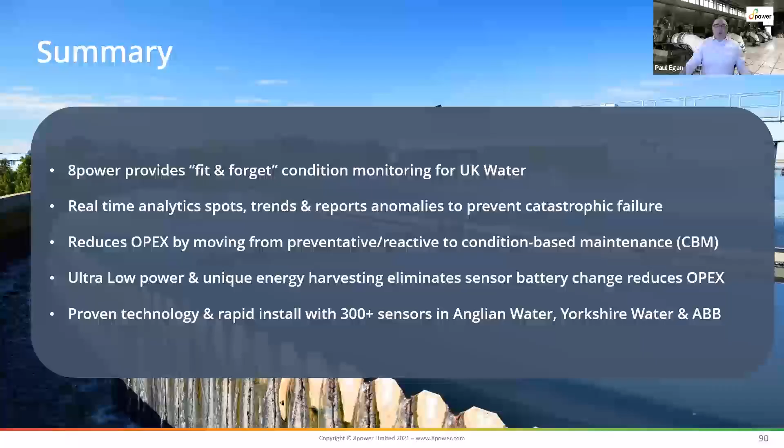Thanks, Paul. Thanks for going through that. Again, lots of information there and pretty clear about the ask to the sector. I can't see any questions jumping through at the moment. One's there, so we'll just give it just a moment. Yeah, sure.

There's a question: do you need a sensor for each piece of equipment? What we've done so far, we prefer, depending on the asset size and class, certainly on larger assets, to put a sensor on the motor-driven bearing, the motor non-driven bearing, plus either 1 or 2 pump bearings if we've got access to those.

Nice and clear. In the interest of time, there might be some questions on there. Feel free to dive in and answer those yourself, or we'll try and round up for people as well. Thanks, Paul, I think, yeah, again, it's very clear there what you're sort of asking to the sector. So thanks for being on here with us. Great, thanks Ben, thanks everybody.

So we're down to the last presentation today. Good to know it's not got to the very end and everyone's dived off. We've got 78 people still online, I think we had 81 at the top, so really great that everyone's still here to hear from FYLD. I'll hand over the floor to, I'm not sure who's presenting from FYLD actually. It's me, Ross. Hey Ross, thanks for coming along. No problem. I'll hand over to you, floor is yours for 4 minutes.

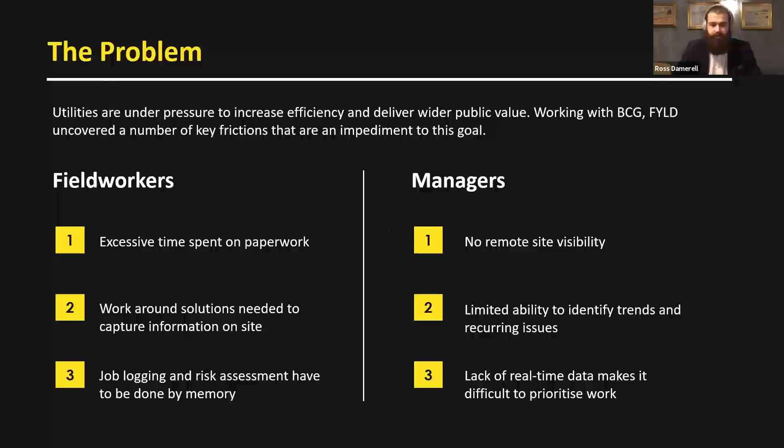So that's where we came in. As a top level overview of the platform, FYLD enables effortless data capture through visual risk assessments and allows real-time visibility of site activities. The AI-based platform pulls unstructured data from recorded videos and creates a risk assessment alongside recommended controls associated with these risks.

So what started out as a predominantly safety-focused tool has developed and had wider benefits around productivity and streamlining operational processes. And that's the key as to why we're different.

Some alternative solutions recreate paper forms, resulting in the same inefficiencies and issues, but with FYLD, workers are safety conscious before starting a job, and managers can monitor this, allowing remote collaboration amongst teams.

This data is then fed back into the FYLD platform, surfacing actionable insights, allowing managers to focus on improving operations while still minimizing risk. So these are the initial improvements, but the secondary benefits gained from this allow companies to transform their core operations.

Enable remote collaboration, and especially in times of COVID, reduce the need for face-to-face contact, whilst also exploring ways of optimizing processes deeper and ultimately providing a better service for the end customer.

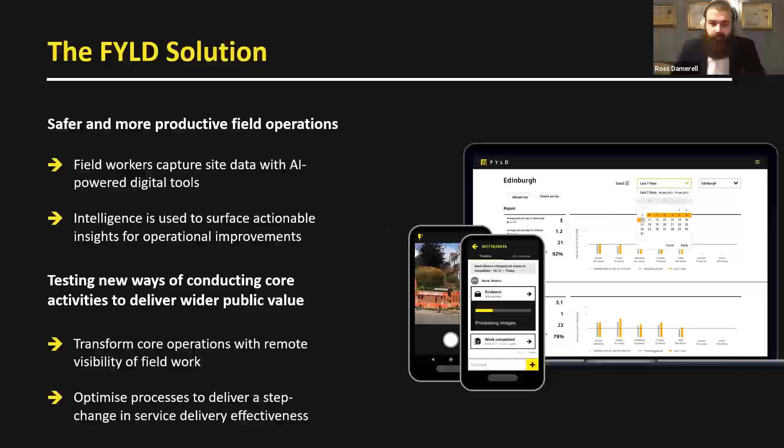In terms of the work we've been doing with SGN, we've seen some impressive benefits over the initial 7 months together from both a safety and a productivity point of view. We're now embedded in all 14 of SGN's depots across the country and have been used in nearly 14,000 jobs since rollout.

These benefits include a 36% improvement in safe days, 89% of jobs being completed faster and safer, and over 6,000 pieces of paper being removed from the process.

The indirect impacts of this has enabled SGN to continuously improve their ways of working, whilst also increasing the span of control between managers and field workers.

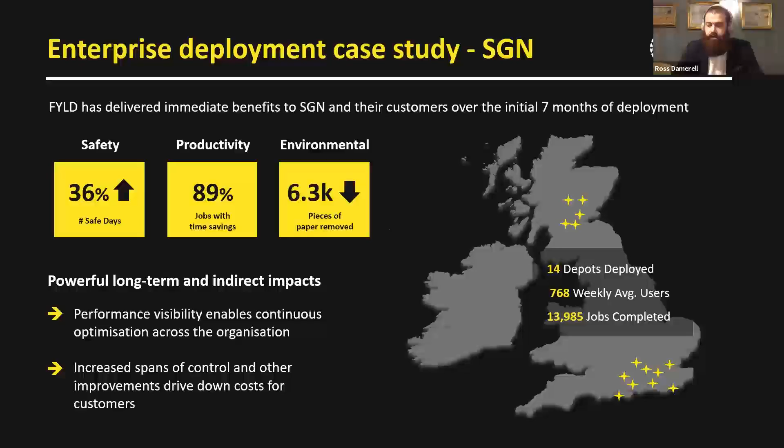So why are we presenting here today? We've already developed with SGN within the gas industry and now making our first moves into water.

Initial feedback's been positive, but we're looking for partners within this industry to help tailor the FYLD technology to deliver these same benefits. We would start with an initial scoping whereby we work together to identify any water-specific changes that need to be made, then begin an initial pilot where we work closely to drive adoption and gather intelligence, and finally optimize the process to deliver tangible improvements to you and your companies.

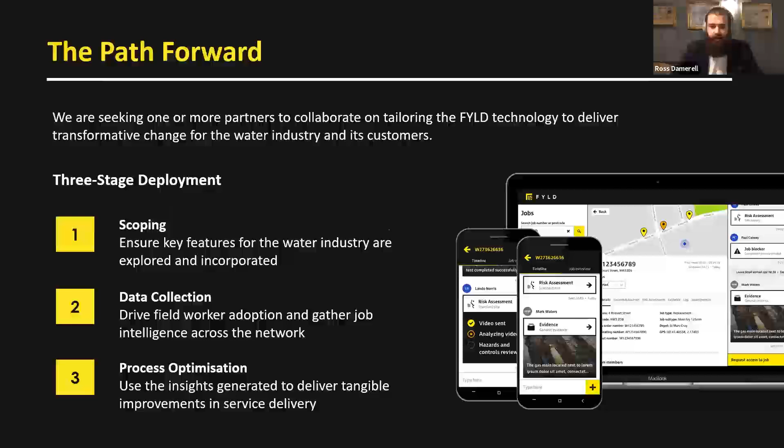Thanks, Ross. Wrapped us up well there, kept us on time. Thanks for a great presentation to round out today as well. I'm glad everyone has been able to stay with us till the very end, at 5:30.